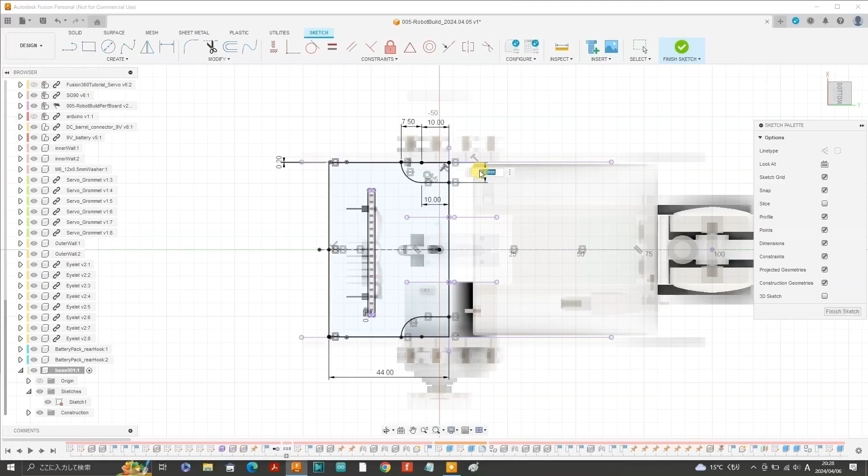In part 10, using Fusion 360, we made significant progress in the chassis design. Today in part 11, we'll continue refining the chassis design and take it one step closer to completion.

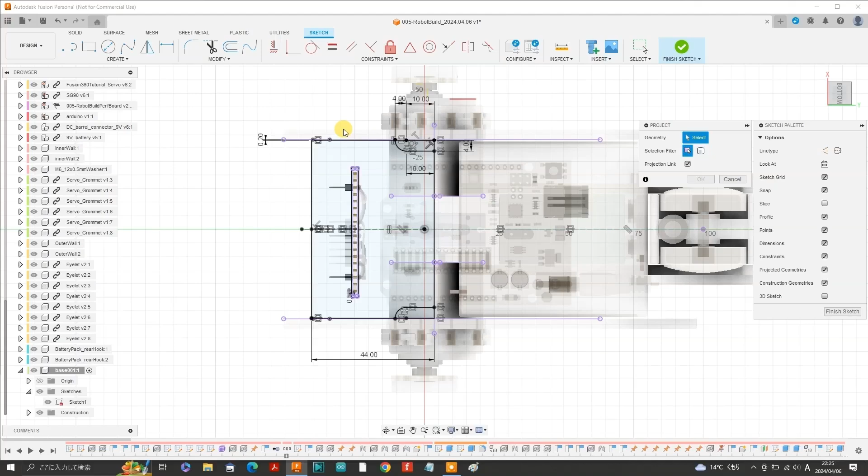First, let's improve visibility by hiding both left and right wheels. Instead of using glue or cement, which usually don't adhere well to HDPE, we'll bolt the walls and bases together while incorporating joinery methods. Edit the sketch on base 1, press P for project, and select the outer edges of the left and right outer walls.

Design a rectangular protrusion or connector tab 4mm from the front end so that it is flush with the outer surface of the outer wall and has a width of 7mm.

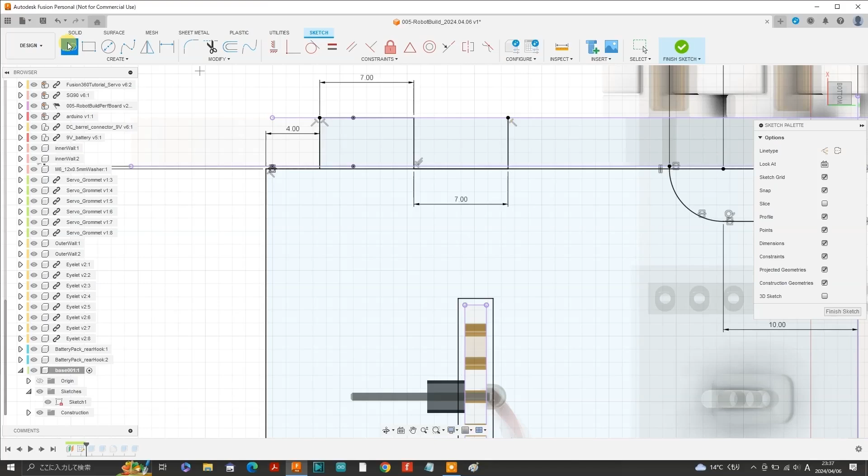Then connect the open end back to the base again. Add a distance of 7mm and sketch out another rectangular protrusion with the same dimensions. Mirror these protrusions by selecting each line segment we sketched, select the center line of the base and hit OK. Then finish sketch. Now before we extrude these rectangular protrusions, we should hide both outer walls.

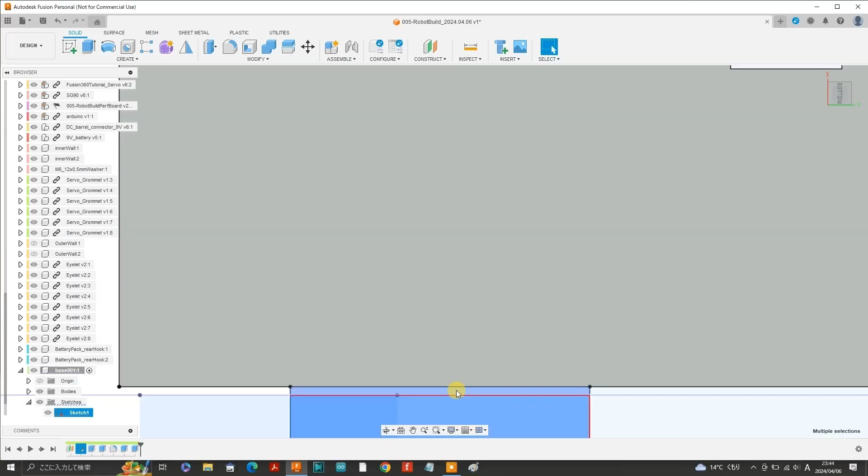Select each rectangular protrusion and zoom in to select the portion of the protrusion that includes the clearance between the base and each outer wall, and extrude by 3.7mm while making sure the operation is set to join in the extrude palette. Now the rectangular protrusions are perfectly formed on both sides of the base.

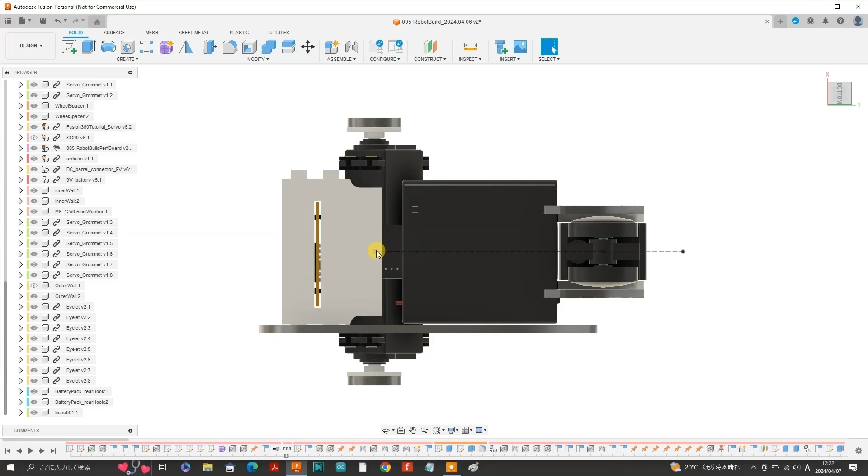Activate the entire design at the top of the browser. Now we'll design a tab for preventing the battery holder from dropping down. Select the face on the underside of the base and create a new component. I've labeled the new component Battery Pack tab.

Create a new sketch. Select the rectangle tool. Select center rectangle from the sketch palette and sketch a rectangle centered on the origin with 25mm. Hit the tab key and enter a length of 40mm.

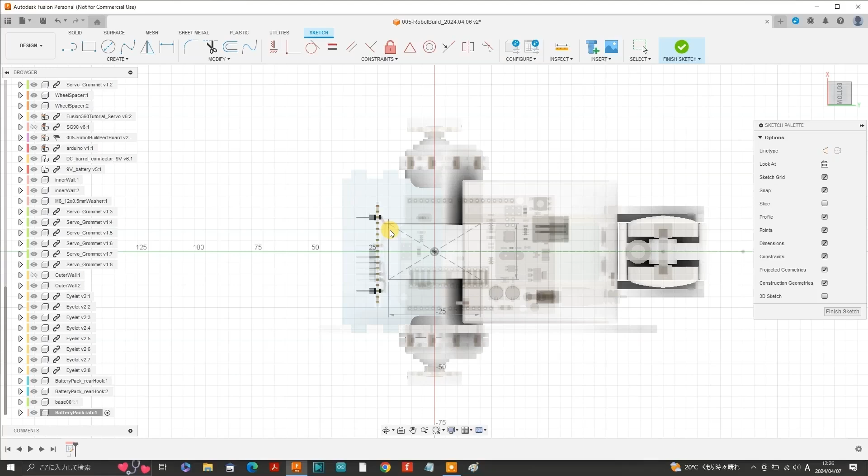Select the circle tool and sketch a circle centered at the center point of the right side of the rectangle and snap it into the corner of the rectangle. Use the cutting tool to remove the left side of the circle.

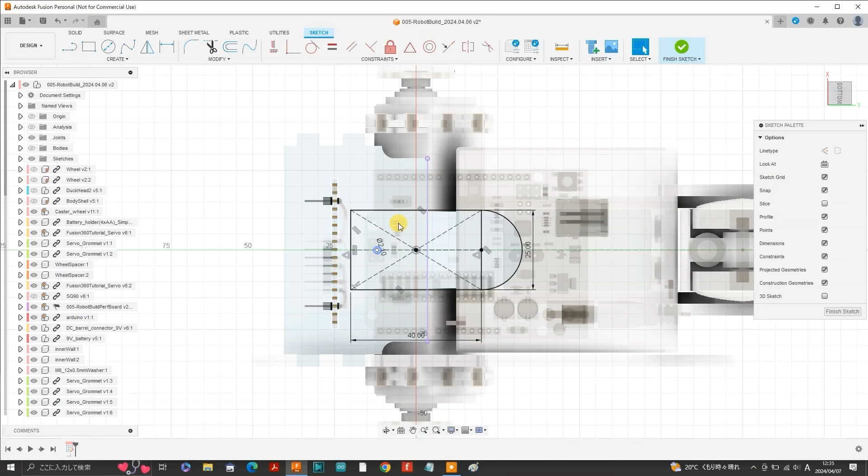Put in a left center line. Here I added a 2.1mm hole at an arbitrary position on the center line, but that should have been a clearance hole of 3.2mm for an M3 screw to fit through. Anyway, this circle is not yet constrained.

I also made a copy of this little circle as I want to fasten the battery holder tab at 2 locations to prevent the battery holder tab from rotating. Use the measuring tool and set the distance from the left side of the battery holder tab to 8mm and the distance between the 2 holes to 8mm.

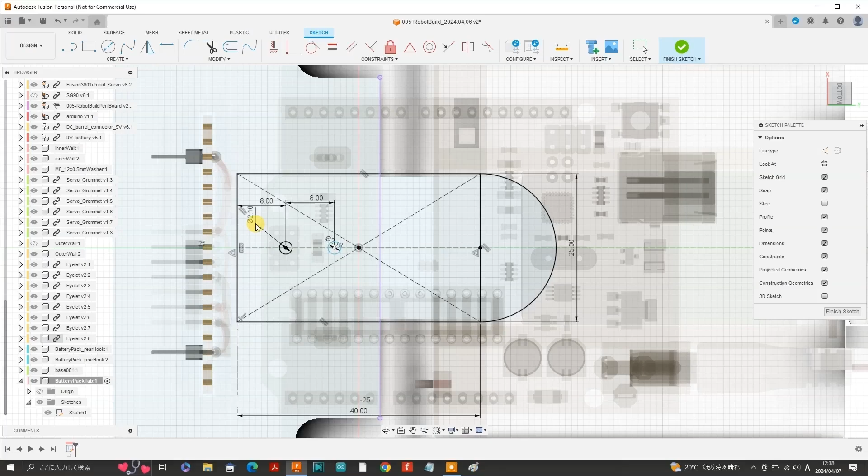Finish sketch. Swivel the design, select the extrude tool and extrude the entire shape of the battery holder tab except the 2 holes. Activate the entire design again.

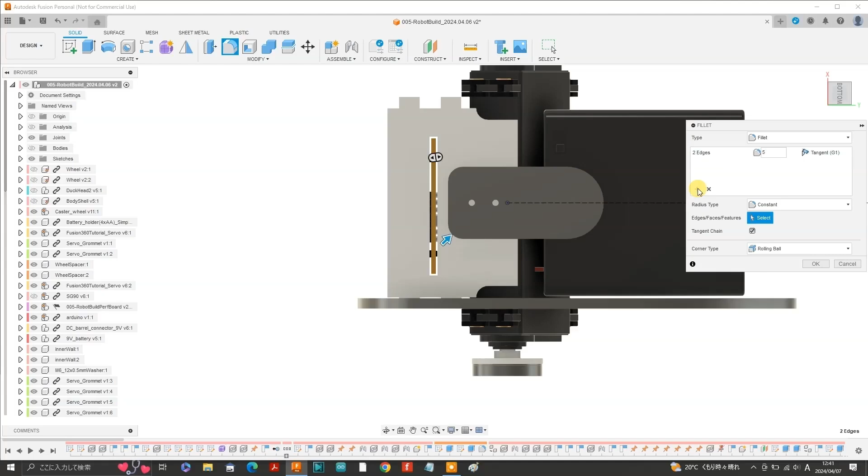Let's round the front corners of the battery holder tab. Select fillet and enter a 5mm fillet. But don't hit OK yet, hit the plus icon, which allows us to do a separate fillet on the same body. So let's select the underside of the battery holder tab and enter a fillet amount of 0.2mm and do the same for the top surface.

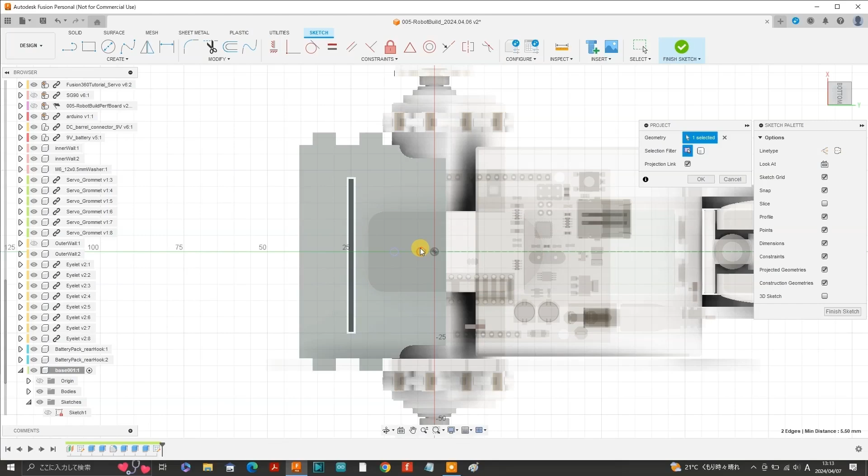Now activate base 1, create a new sketch and select the underside of the base, press P to project and select the 2 holes of the battery holder tab. Here I am sketching 2.1mm holes on the base, which is the actual pilot hole diameter for an M3 metric thread.

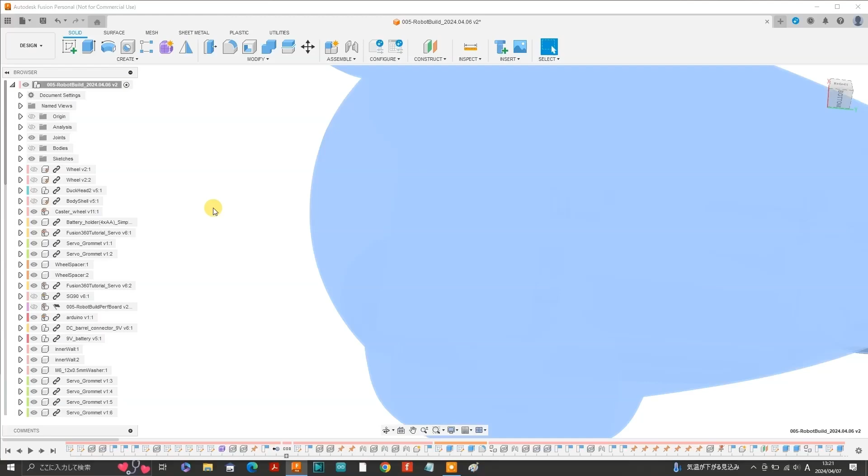Tilt the underside a little and we need to hide the battery holder tab and then form the 2 holes through the base by extruding into the base by 3.7mm. Activate the entire design again and unhide the battery holder tab.

Before we carry on, I think we should gather all the servo grommets together under a single component folder. Create a new component, label it grommets.

Select all the grommets and drag them into the new grommets component folder. I did the exact same thing with the eyelets as well.

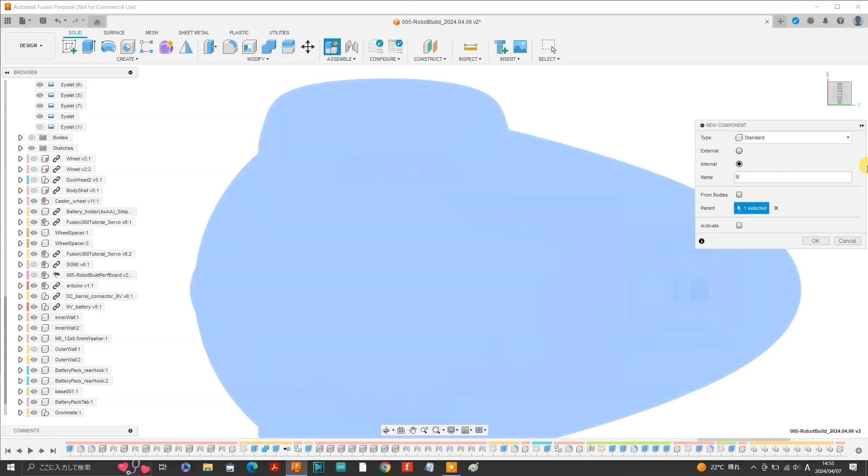Now let's make some M3 washers for the battery holder tab. Create a new component and label it M3 washer. Activate the M3 washer on the browser.

Create a sketch. I selected the undersurface of the battery holder tab as the sketch plane, but anywhere would be fine. Sketch a 3.2mm circle on the origin and an outer diameter of 7mm for the particular washer I'll be using. Extrude the washer by 0.5mm.

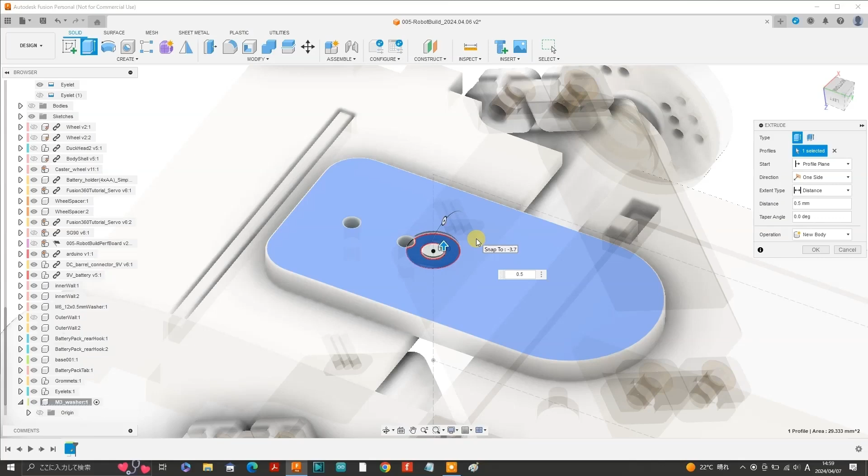Hide the battery holder tab and hide base 1. Now select the entire washer and apply a fillet of 0.1mm. Press A for appearance, and I selected a black metal oxide coating for the color of the washer.

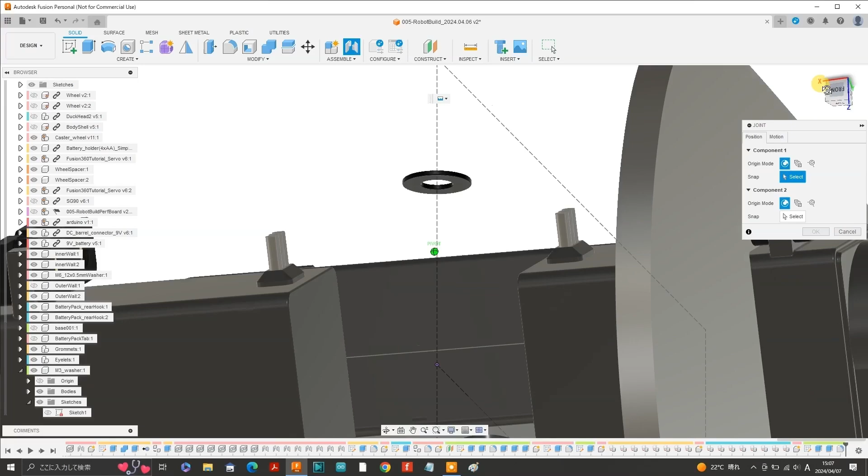Hide base 1 and the battery holder tab. Select joint from assemble. I didn't need to swivel the design around to select the other side of the washer, but that's what I did in the footage.

Press the control key and select the central snap point. Swivel the design back to the underside. Unhide the base and the battery holder tab. Select the central snap point of one of the holes and hit OK.

Select the washer from the browser. Select the move tool and check create copy. Move the copy to an arbitrary position and hit OK.

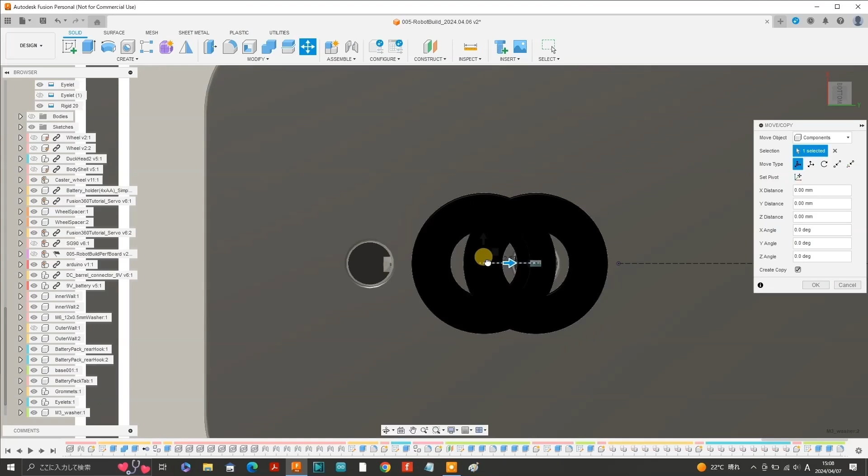I also used joint from assemble to attach the washer onto the underside of the battery holder tab in a likewise manner. I labeled each joint M3 washer to battery tab.

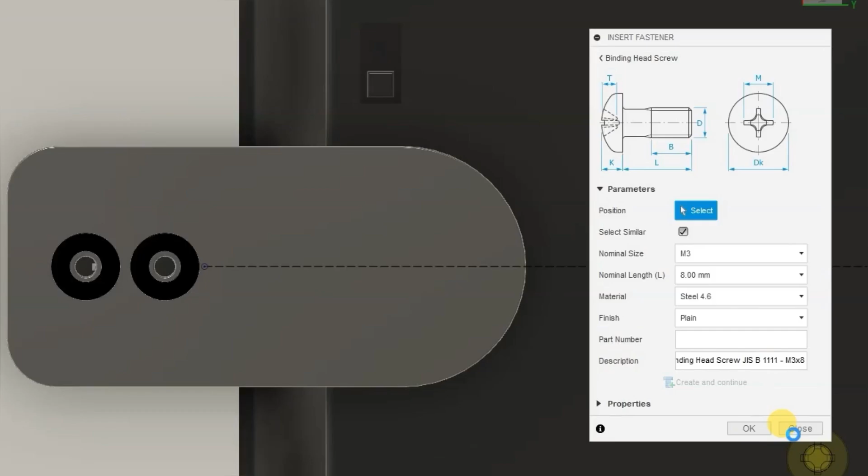Now let's use insert to add an M3 screw to the design. I selected a binding head screw size M3 with a length of 8mm. The screw appears here with the move tool already activated. Move it into position and hit OK.

It has vanished, so let's look for it. So with the underside of the head of the screw visible, create a joint by selecting the center snap point on the plane of the underside of the head of the screw, and then selecting the center snap point on the plane on the underside of the washer.

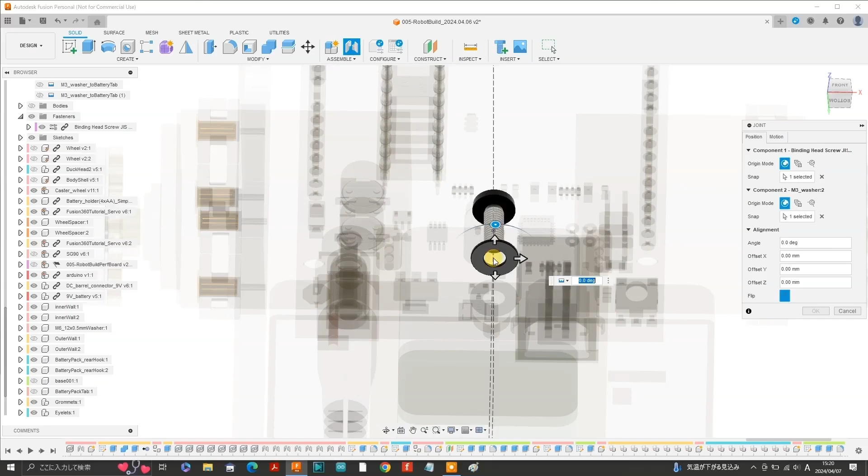I labeled this joint M3 screw to battery tab. Create a copy of the screw and attach it to the other washer in the same manner, and unhide the battery holder tab and the base.

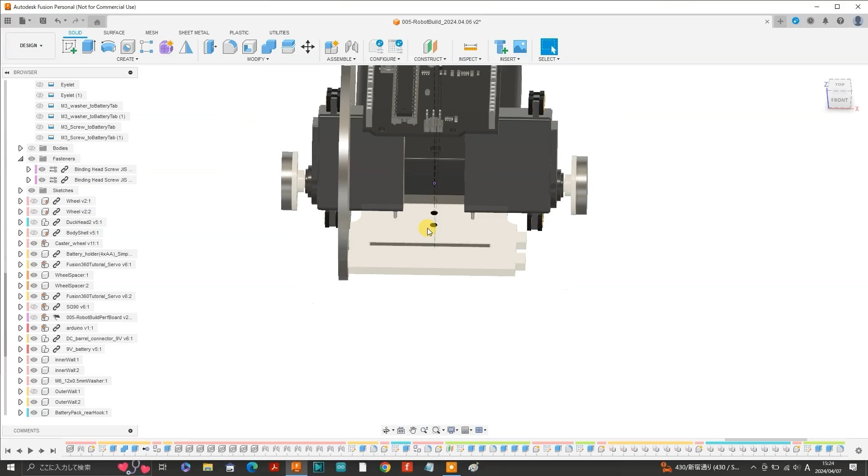Now let's zoom in to the top surface of the base, and we can see that the end of each screw is flush or approximately flush with the top surface, confirming that the length of 8mm for each screw was the right length. Once the robot is fully assembled, we won't have access to the top surface of base 1, so that's why I decided to thread each hole for the M3 screws to screw into.

Swivel the design to the top view and hide the Arduino. Create a new component and label it base 2. So we are designing a second base for our robot chassis. Activate the component and hit OK.

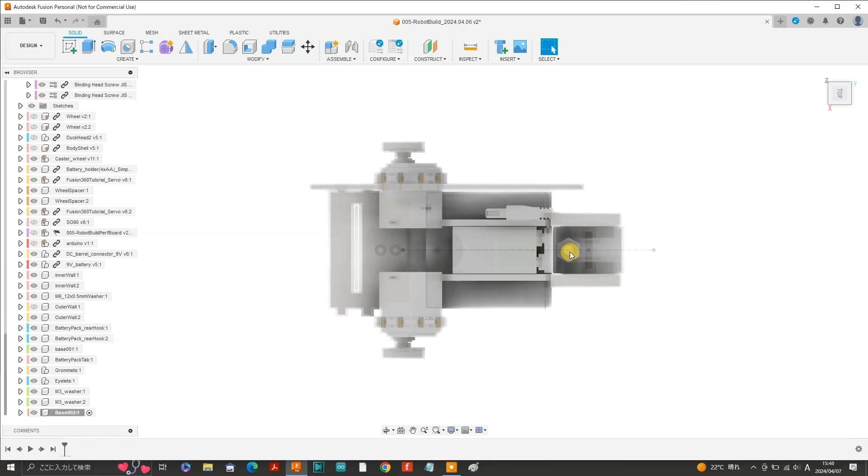Zoom in and select the top of the washer that is on the caster wheel and create a sketch. Press P to project. Select the bolt diameter of the caster wheel assembly.

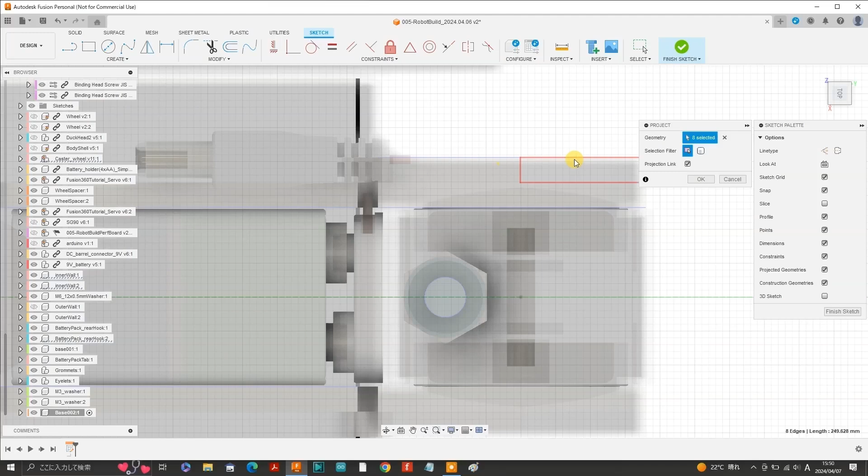Select the inner surface of the right inner wall, and likewise select the inner surface of the left inner wall. Also, select the rear inner surface of the right inner wall. Select the outer surface of the wall that constitutes the right battery rear hook, and likewise for the left inner wall and the left battery rear hook.

We also mustn't forget the outer surfaces of the left and right inner walls. Hit OK and create a 6.2 clearance hole centered at the center of the bolt of the caster wheel.

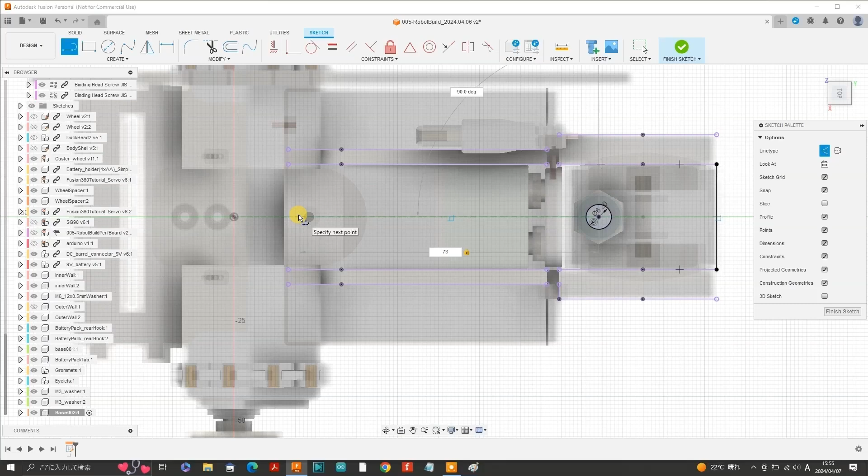Select the line tool and connect the two ends of the inner wall. Let's sketch a construction line from the center of the circle to a distance of 73mm. From that point, sketch a line at right angles to the right inner wall, then sketch in the rear direction along the inner wall by 8mm.

Sketch a line outwards by 3.7mm, the thickness of the inner wall, then an 8mm line extending rearwardly along the outer surface of the right inner wall, a line extending inwards back to the inner surface of the right inner wall, giving us a first 8mm wide tab.

Sketch another 8mm wide tab starting 16mm behind the first one.

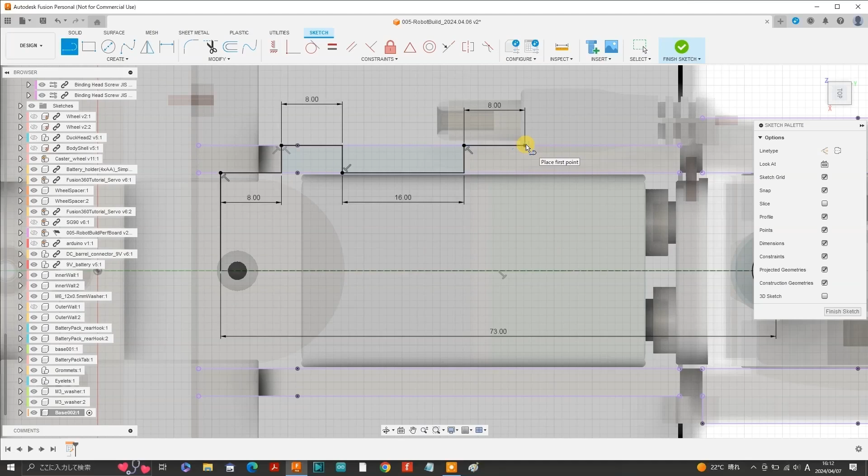After that, from the rear side of base 2, sketch an 8mm line forwards, then sketch an outward line, this time to the outer face of the battery rear hook. Sketch a 16mm wide tab, then a line back to the inner wall surface, and a line to the second 8mm wide tab. As we can see, this sketch is fully constrained.

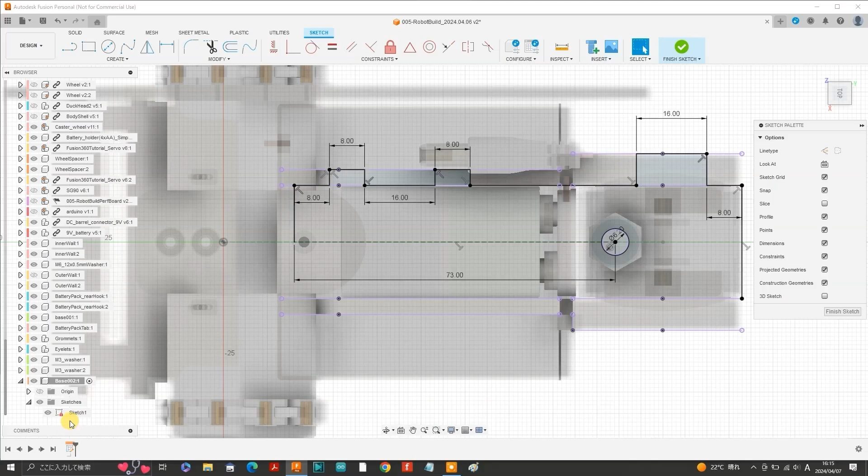Select Mirror from Create and select all the line segments we have just created and the central construction line as the mirror line, and hit OK. Finish sketch, select the Extrude tool, and extrude all the portions of base 2 by 3.7mm.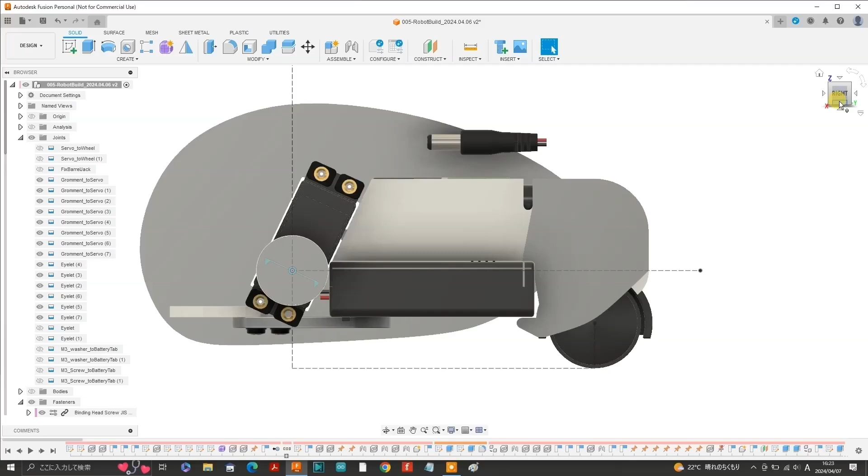Activate the main design again, swivel to the side view, and unhide outer wall 1. Select the outer face of the outer wall and create a new sketch. Press P to project and project the shapes of the tabs of base 1.

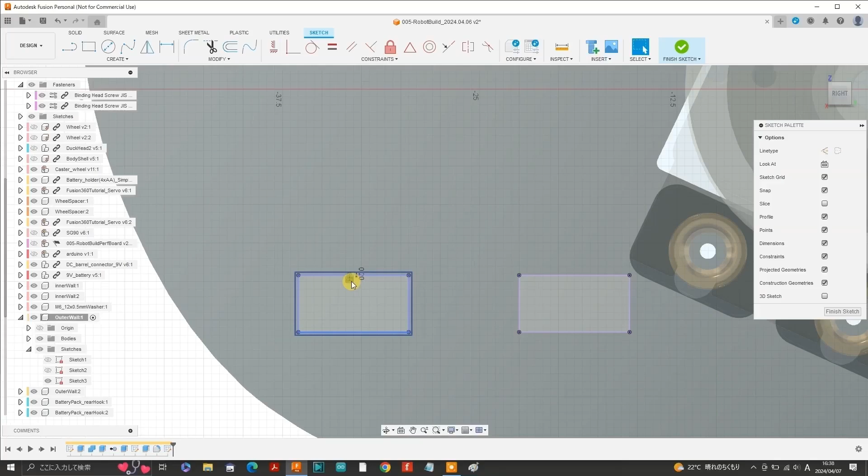Next, select the offset tool, select the rectangular shape we have just projected, and set the offset to 0.2mm. Zooming in, we can see a slightly larger rectangle surrounding the projected rectangle. Do the same with the other rectangular tab. Now finish sketch and extrude these shapes as holes by cutting through by 3.7mm.

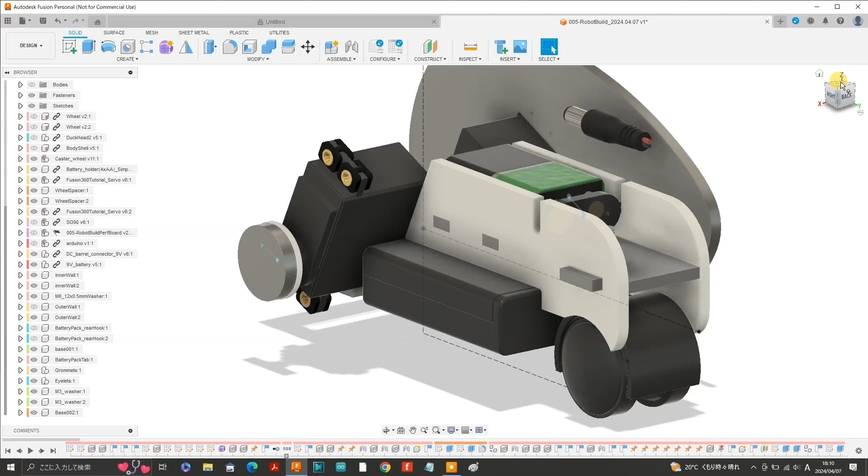I also did the same for the tabs that protrude from base 2 through inner wall 1, which automatically forms corresponding rectangular holes in inner wall 2 as well. Also, I formed a corresponding rectangular hole in each battery pack rear hook using the same technique. So there we have base 2 with its rectangular tabs fitted into corresponding rectangular holes in the inner walls and the battery pack rear hooks.

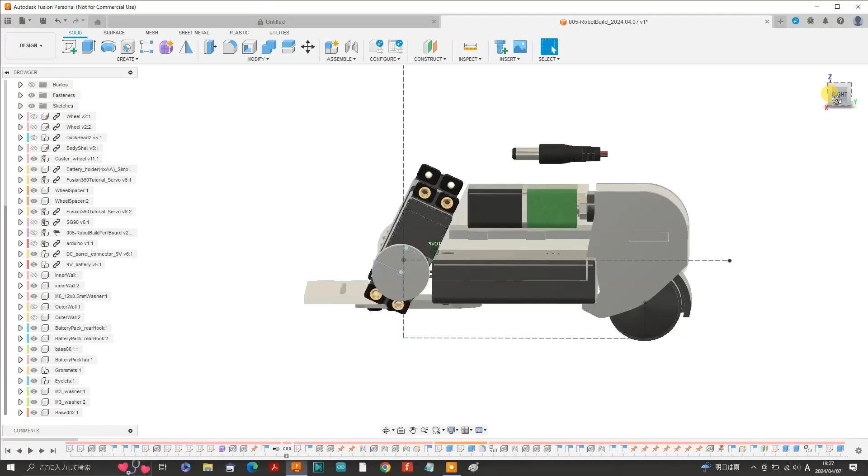Hide the left inner wall so that we can see the side of the 9V battery. There's a slight gap between the underside of the 9V battery and base 2, so let's use the move tool first and move the 9V battery upwards to an arbitrary position.

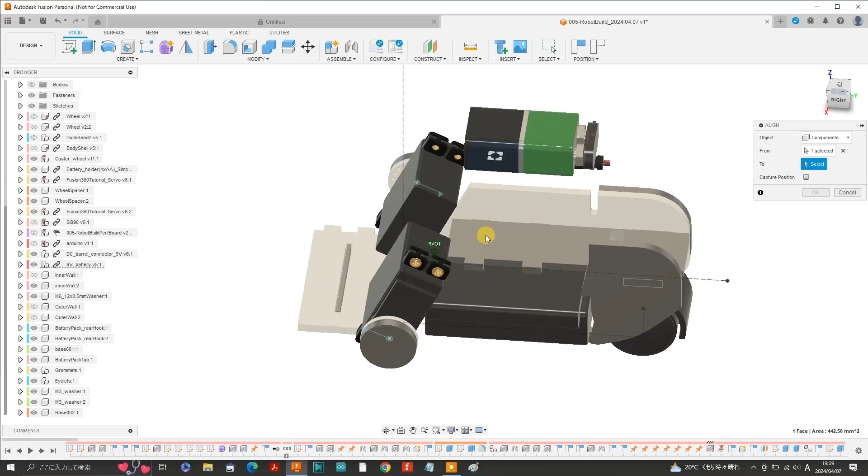Next, use the Align tool and select a snap point, which is at the center in the lateral direction, on the underside of the 9V battery, and then select the top surface of base 2. The 9V battery glides onto base 2 to come into contact with it so that there is no gap between the two. I'll just unhide the right outer wall.

You may have noticed this part inside the slot formed in base 1, which appears to have been left over from when I formed the slot for the circuit board. I unhid the sketch on base 1, selected the leftover portion, and extruded it out.

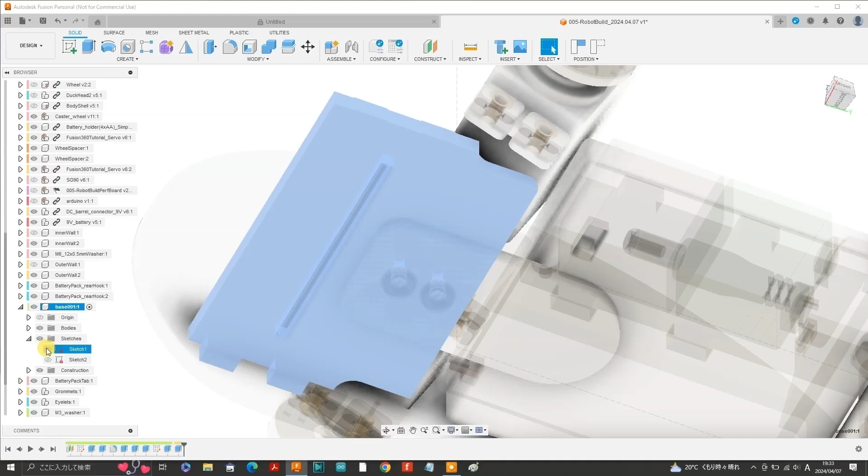It looks like I have lopped off two rectangular tabs by accident when I extruded the rectangular holes in the left outer wall, so we'll just quickly extrude new ones from the original sketch of base 1. Let's also color base 1 white again.

Let's also unhide the circuit board and the right outer wall. Create a new component and label it board guard.

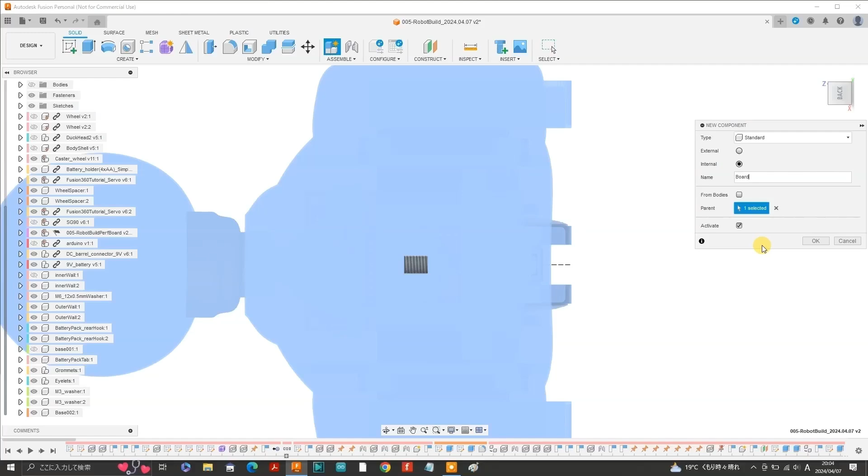Actually, before we carry on, I need to center the lateral or left-right position of the circuit board. So I'll move the circuit board to the right by 2.25mm divided by 2, since the circuit board was offset to the left by that amount.

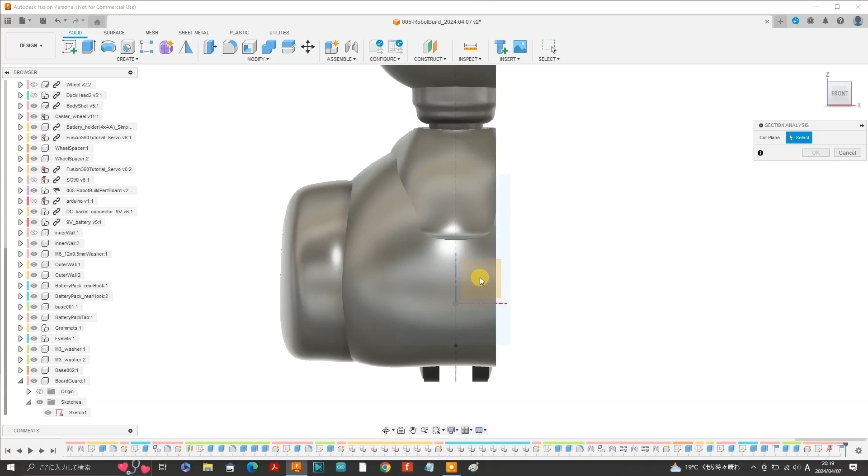While we're here, let's unhide the body shell and select section analysis from the inspect menu. Select the front plane and move it back by -1mm.

Now, although the circuit board is aligned correctly in the lateral central position, the slot in base 1 was mistakenly formed when the circuit board was out of alignment, so we'll need to fix the slot at some stage.

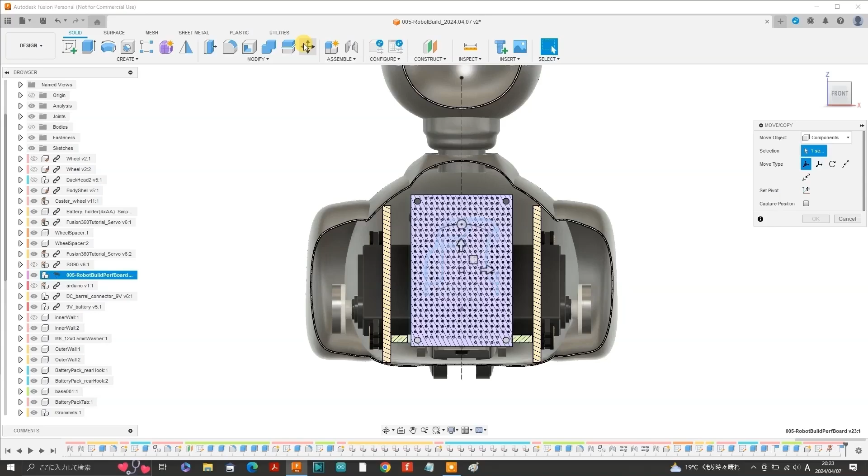Anyway, let's adjust the vertical position of the circuit board by using the move tool and moving it down by -6mm. Now here you can see I have removed the slot for the circuit board from base 1 because the slot was not aligned correctly. I have also removed the left and right slots as I had second thoughts on whether they would actually be necessary.

Select the rear surface of the circuit board and create a new sketch. Let's hide components that obscure our view of the circuit board, and hide base 1 as well.

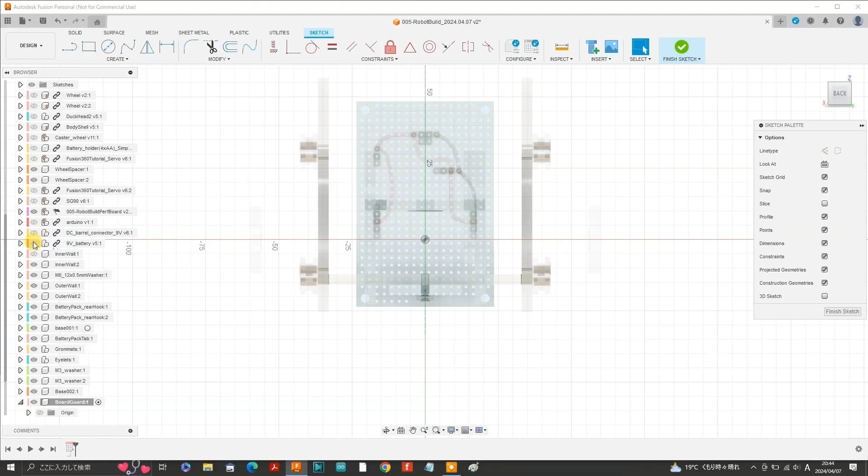Project the outer edges of the circuit board and the holes for fastening the circuit board. Select the inner and outer edges of each outer wall. Hit OK, unhide base 1, select the rectangle tool, and create an initial rectangle that surrounds the outer side of the walls.

We need to design some projections that are to be inserted into the outer wall.

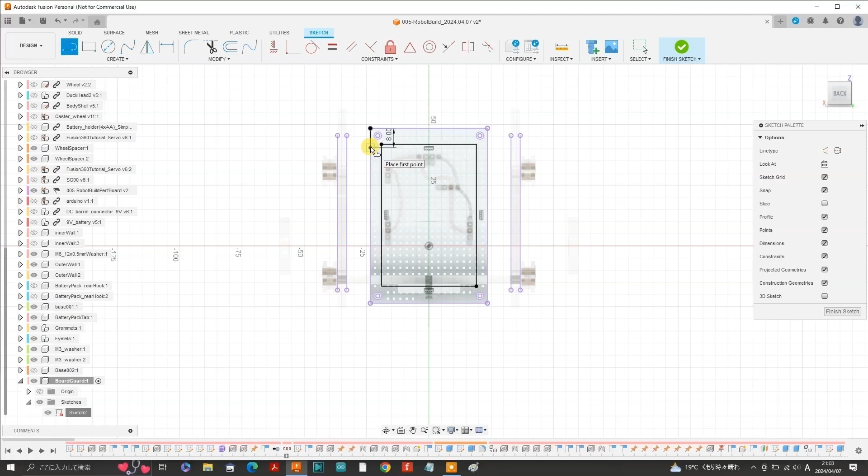...walls. So we'll start from 8mm down from the top, sketch a horizontal line from there to the outer face of the outer wall, give the projection a 12mm vertical thickness, and sketch a horizontal line back down to the main body. From there, sketch a 20mm vertical line downward and sketch another projection in the same manner.

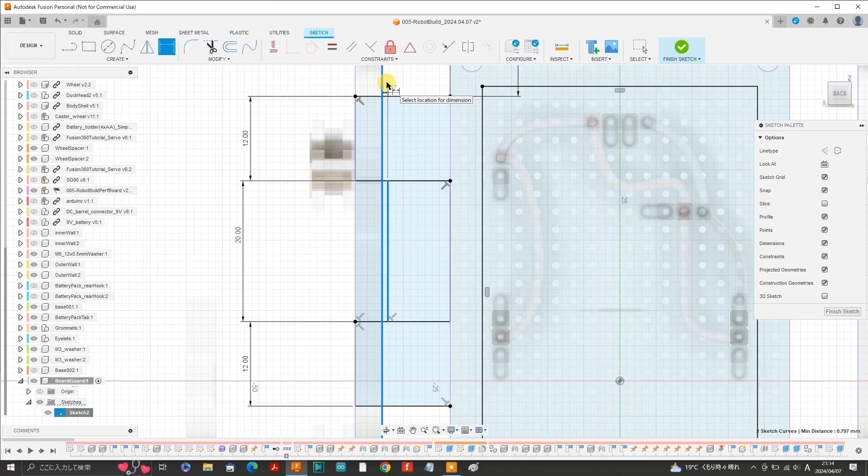Now we want to fill in the space between the two projections, so let's sketch a line between the two projections, parallel and close to the inner surface of the outer wall. Use the dimension tool to set a distance of 0.2mm between these lines.

Now we need to mirror these newly sketched lines to the right side, but first let's sketch a vertical construction line through the origin. Then we can select these lines as objects and the vertical construction line as a mirror line, and we can hit OK.

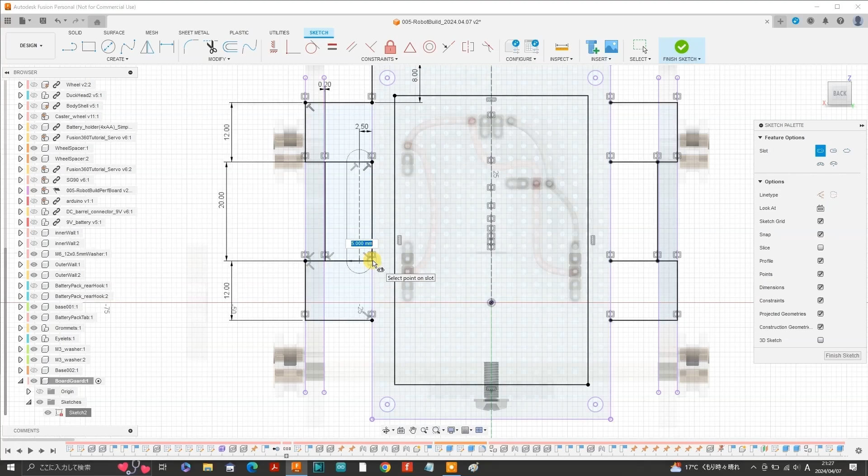Next, we want to design some slots to allow wires to go through. Sketch a construction line between the two projections and constrain it to 2.5mm from the main body of the board guard. Now create a center-to-center slot defined at each end of the construction line and dimension the half width of the slot to 2.5, which constrains the whole slot. Then likewise mirror that slot about the center line.

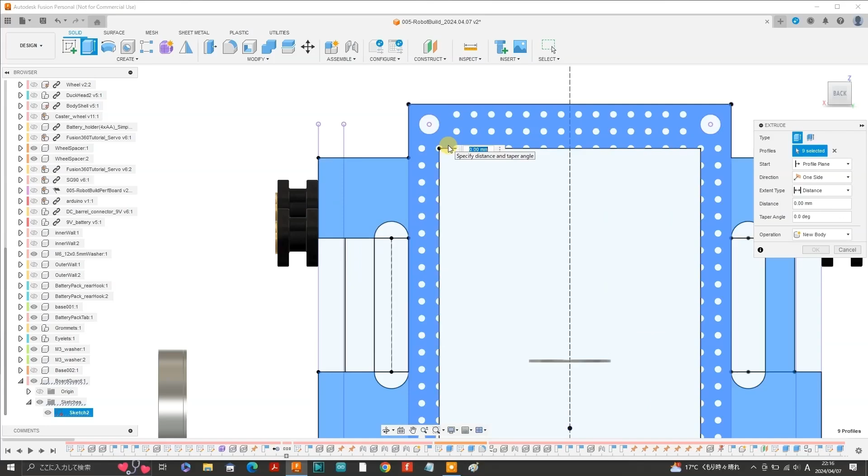There's a few white patches on the right side of the profile, so I'll just sketch in a few more lines and that did the trick. Finish sketch, select extrude and the various parts of the board guard. Since the plane lies on the circuit board, all the holes of the circuit board show up, so I'll just select all those as well. And here I have extruded the board guard by 3.7mm.

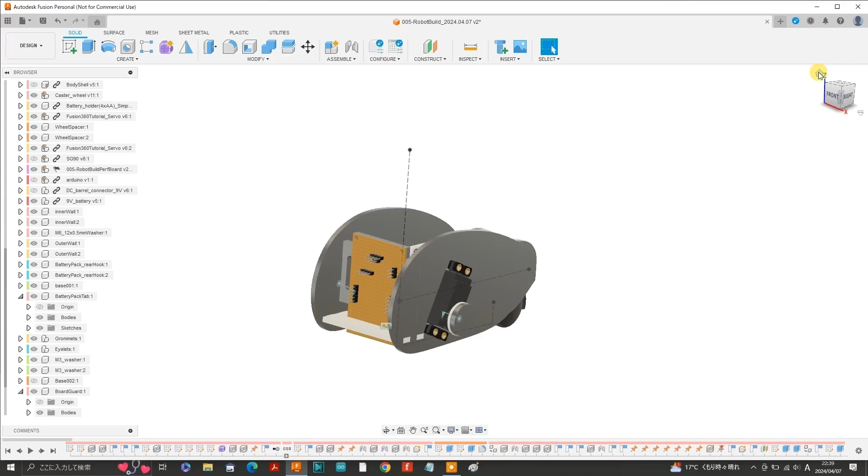Now we can unhide components. It looks as though the battery pack tab has moved down some distance from base 1 for some reason, so I'll need to put that back by using the joint tool. And there it is back in its proper place. Let's hide the left outer wall for better visibility. Zoom into the rear side of the board guard. Press A for appearance and color the board guard white. Unhide base 2 as well.

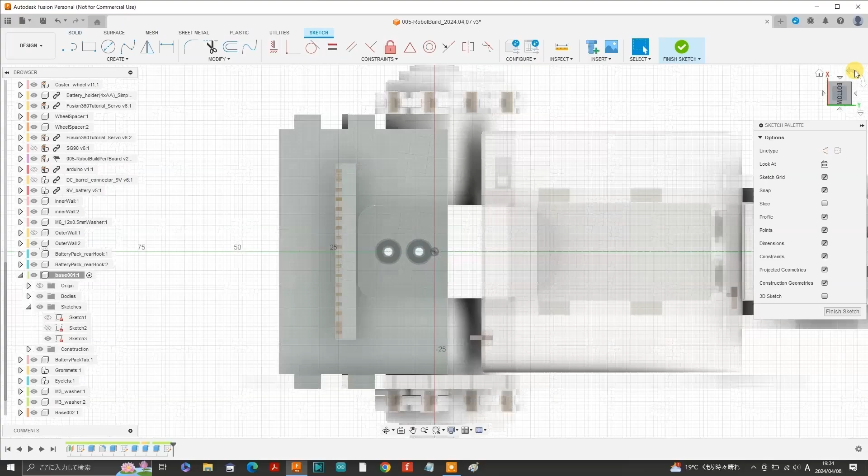Now that the circuit board has the board guard attached to the rear side, we can now form a wider slot in base 1. So activate base 1 and create a sketch on the underside face. Press P to project, select the periphery of the board guard and the circuit board too, and hit OK. Next, select the offset tool, select the outer perimeter defined by the board guard and the circuit board, and create an outwards offset of 0.4mm.

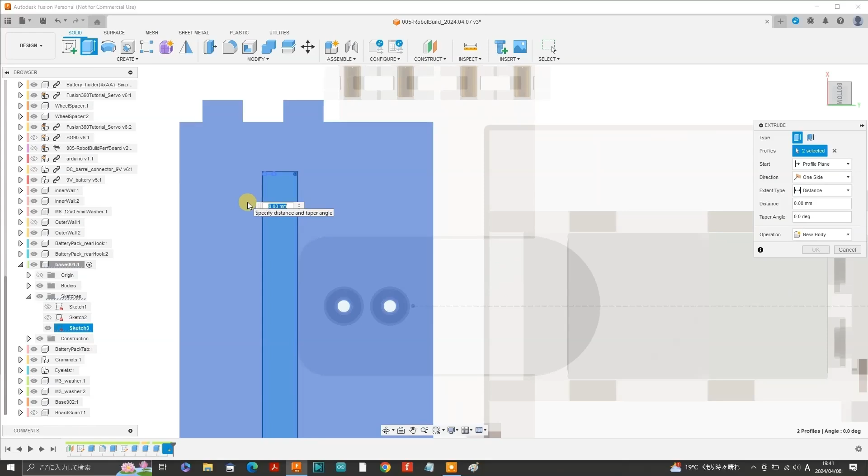Next, we need to use the extrude tool to form the slot. Hide the circuit board and the board guard, select the slot and the surrounding offset section, and extrude by -3.7mm to form the slot. Activate the main design again.

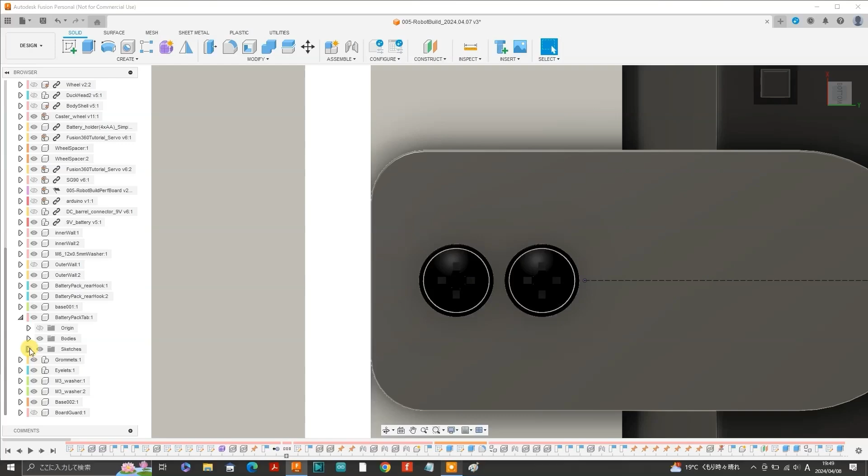Upon measuring the distance from the slot to the front edge of the battery pack tab, it was almost nothing at 0.009mm. However, we'll need to widen the slot later to allow for a rear cover for the board guard, so we'll need to shorten the battery pack tab a little. So let's unhide the sketch for the battery pack tab and edit that sketch. Let's change this dimension from 40mm to 38mm and finish sketch. Hide that sketch, and there we have the battery pack tab with its size adjusted.

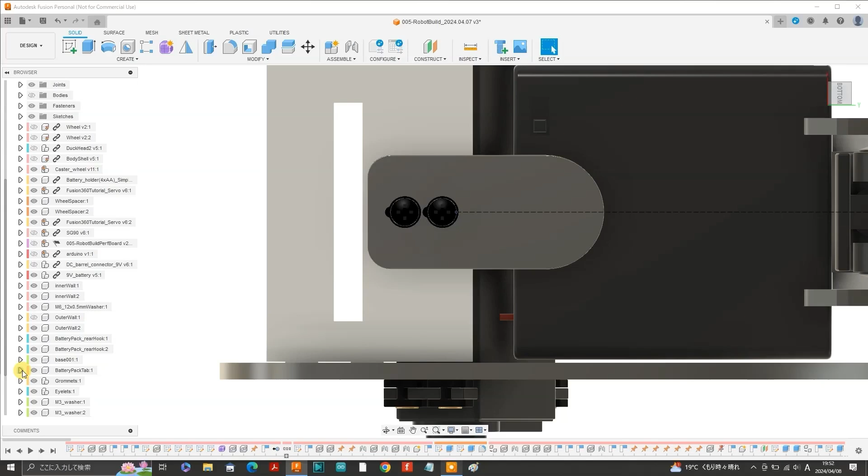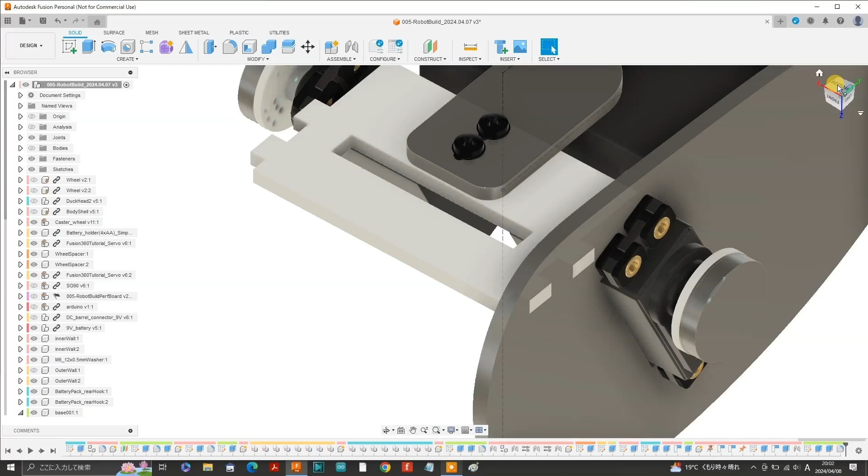We should also take this opportunity to widen the slot in base 1 to allow for a rear cover. So edit the sketch of base 1, zoom in and sketch in a thin rectangle at the rear side of the slot. Make sure the short sides of the rectangle are coincident with the short sides of the slot, and use the dimension tool to set the width of the rectangle to 0.5mm. Now that's ready to be extruded. I've skipped the footage for extruding or cutting that part, but here's the widened slot.

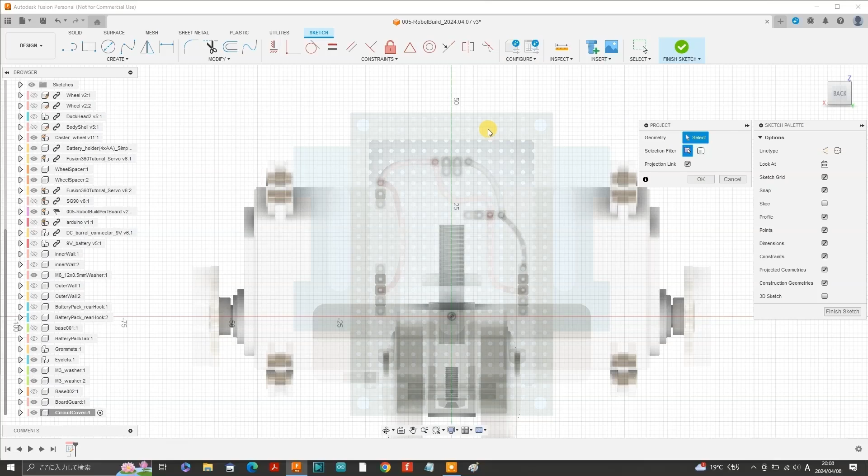Let's unhide the board guard and the circuit board. Zoom in to the rear side of the board guard and create a new component. Label it Circuit Cover. Select the rear face of the board guard and create sketch. We'll just hide a few components for better visibility. Press P to project. Select the entire rear face of the board guard and hit OK. Extrude in the rear direction by 0.5mm.

Activate the main design again. Press A for appearance and color the circuit cover white. And let's unhide some more components. So here we have the circuit cover attached to the back of the board guard to protect the wiring of the circuit board.